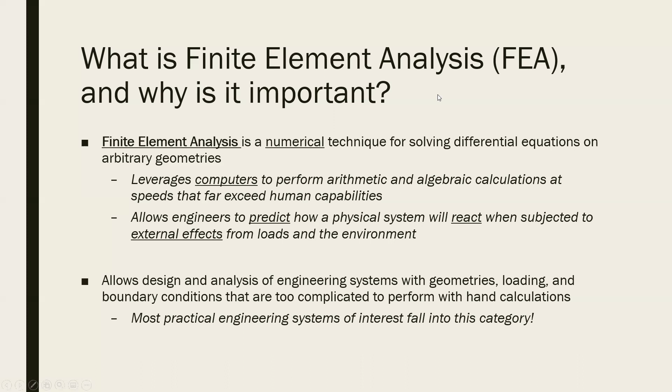The nice thing about finite elements is that it's not really limited to complexities in the geometry or the loading or the boundary conditions. A lot of times, when you're doing hand calculations, you're limited to really simple situations just so that you can actually solve the problem. But finite elements aren't really limited by these things. The nice thing about that is most engineering systems are in this category where they have a complex geometry, they have complex loading that you need to solve for. So finite elements really give you a chance to really analyze these systems in detail.

Alright, so let's talk about the different kinds of analysis that are out there. When you're performing what I like to call an engineering analysis, a lot of times you're trying to find out some information about your system. So let's say that you have a car, and you want to find out whether this car can withstand an impact, let's say it's crashing into a tree. There's different ways that you can go about finding out that information.

The first way that you can find this out is with what I like to call analytical methods. These are pen and paper calculations that solve, essentially you're solving some governing equations, you're doing some math, but because you're doing the calculations by hand, they have to be very, very simple. Because even humans with the highest computing capabilities, there's no way they can do computations on the order of computers. So if you're doing analytical methods, a lot of times you're doing simple calculations, kind of what people call back of the envelope calculations.

Analytical methods are great, and they have a role. It's not that people don't do these in industry, but they are limited to simple problems or simple calculations. The second type of analysis out there is experimental.

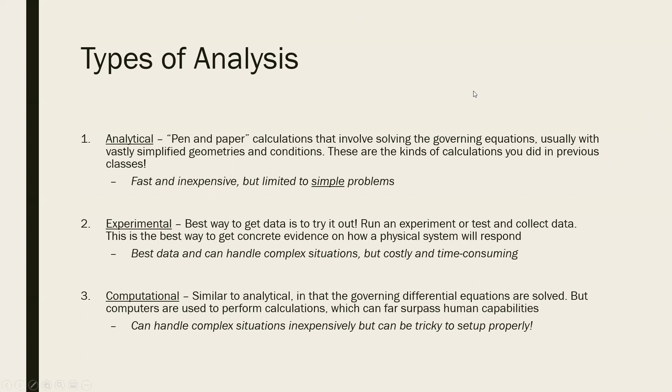If you have just a very simple beam like this, it's relatively easy to do. We can just solve the beam equations. We have just a simple 1D beam.

It's good. It's all good in the hood, right?

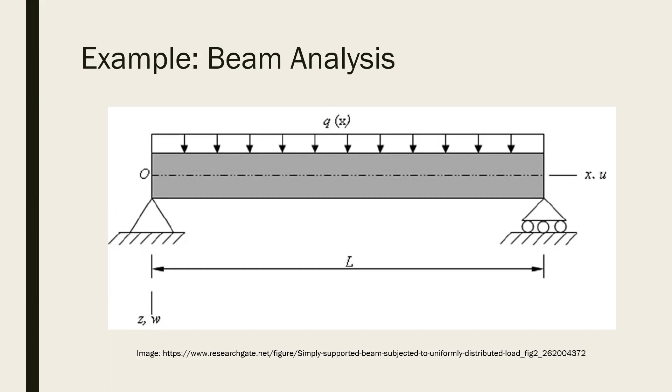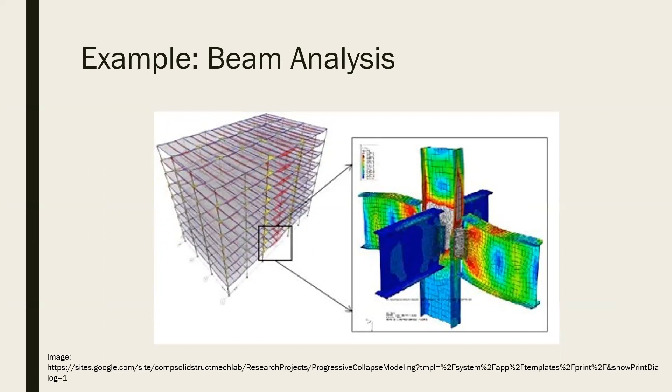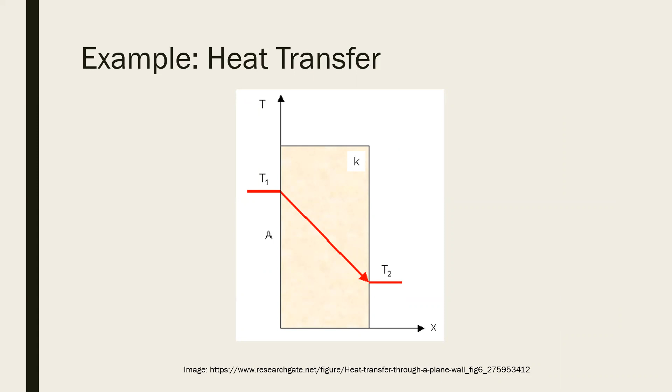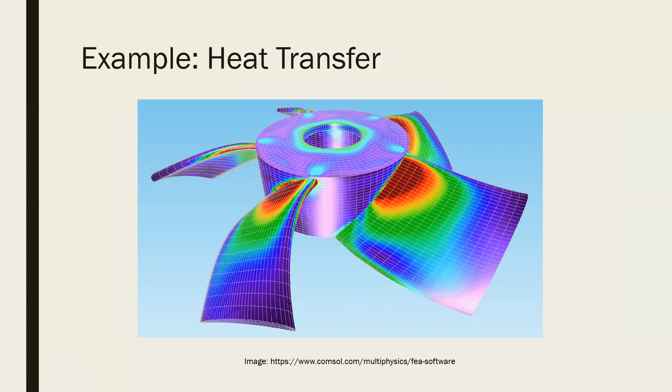Okay, let's do an example from heat transfer. If you want to find out the temperature distribution, or how the temperature varies in a solid block of material, it's simple to do if you have just a simple situation like this. But if you want to find the temperature distribution in a turbine as it's running, as hot air or hot gas is running past it, that's a lot harder to do with just hand calculations. So for something like this, you're going to have to run a simulation to get information that's useful for you.

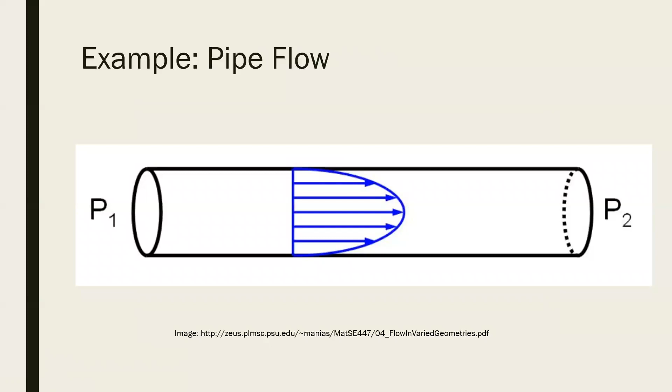And then lastly, we're not going to do much of this in this class, but you can also do fluid flow simulations. If you have fluid flow in a pipe, a simple situation like this, it's not too difficult to solve the equations and find out what the velocity looks like. But if you want to do something more interesting, like solve for the velocity of blood or fluid in your blood vessels, then you would have to run a simulation, because the boundary conditions and geometries are much more complex.

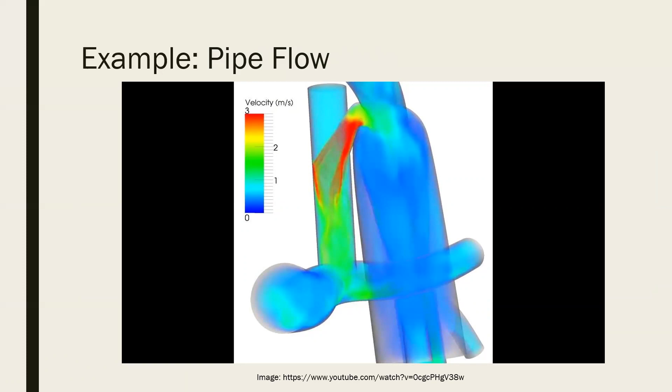All right, let's brainstorm here. I like to turn this to you guys, especially for a graduate class like this. I think a lot of you are coming in with a lot of experience, either working in industry right now, or from your undergraduate experience. So what are some situations you may have come across in your work, or a previous project, that you think you can apply finite elements to in order to analyze it?

I can jump in here, Professor. So a lot of the experiences I've had with finite element analysis...

So just to give a little background, there's something a lot of electronics companies use called a brazed cold wall heat exchanger. Typically it's a really thin piece of metal with an empty volume on the inside, and there's some sort of intricate path where the fluid flows through. There might be some fins on the inside, just bent pieces of aluminum that are bent hundreds of times in a really small space. They'll use finite element analysis to develop a model of what kind of pressure drop they could expect throughout that heat exchanger, and also to determine what sort of heat exchanger capacity they have available over the surface area of the brazed cold wall. So it's a twofold process where they'll use CFD to determine exactly how the fluid is functioning on the inside of the device, and also what sort of cooling capacity it could provide to electronics mounted to it.

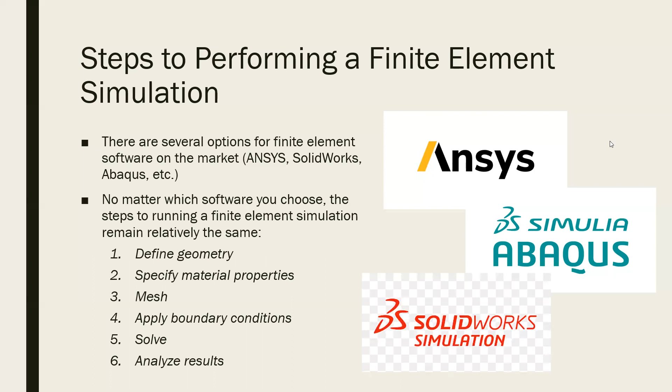Every company kind of has their own software that they like, and as Khan was saying, it's really convenient when it's all in one software. So if you can CAD, simulate, and produce drawings all from one software, that's super convenient.

The first step to any practical finite element simulation is you have to define the geometry. That means you have to define what the thing is you want to run your simulation on. Most of the time this comes in the form of some kind of CAD file. Most of us here are familiar with CAD - it stands for computer aided design, and it's just a digital representation of the geometry you want to simulate.

Let's say the goal of your engineering analysis is to find out the structural stresses inside a bridge. Then you need a CAD model of that bridge that defines the bridge geometry. Another example: let's say you want to find out how much a beam is going to deflect or deform. Then you need a CAD model for that beam.

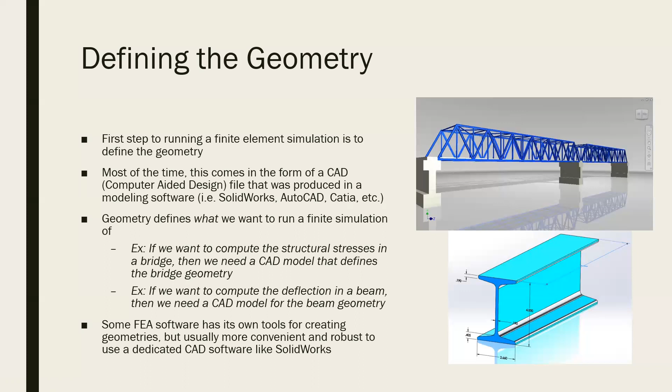A lot of finite element software has its own tools for creating geometries. ANSYS does have its own CAD tools, but they're not as convenient or as robust as a dedicated CAD software like SolidWorks. So a lot of times you'll produce the CAD in a different software, like SolidWorks, and then import that CAD file into ANSYS to perform a finite element simulation. But these softwares are trying to become a complete suite of tools, so maybe your company just has ANSYS, or maybe just SolidWorks. There might be less and less of this need as these softwares become more well-rounded.

The next thing you have to specify is the material properties. Now that you have your geometry, you have to specify what it's made out of. This is really important because different materials have different structural or thermal characteristics. It's important to assign these properly to ensure our finite element simulation is accurate and reliable. If your bridge is going to be made of steel, you don't want to assign its material as copper inside your simulation.

Or even plastic - that would be the worst thing, because copper has very different behavior and properties than steel. A lot of these materials have things like density, Young's modulus, Poisson's ratio, or if you're talking thermal, thermal conductivity and thermal capacity. These properties have a huge influence on how that structure or geometry responds to external forces, so you want to make sure you assign material properties properly.

Material properties might seem like a simple thing, because a lot of times people think of structural material properties as elastic modulus, density, Poisson's ratio - just a few numbers. But materials can become really complex. We'll go over this a lot later this semester, how to assign these properly. You can have really complex materials like anisotropic materials, composite materials, non-linear materials, and for those you need to be really careful about how you assign the material properties.

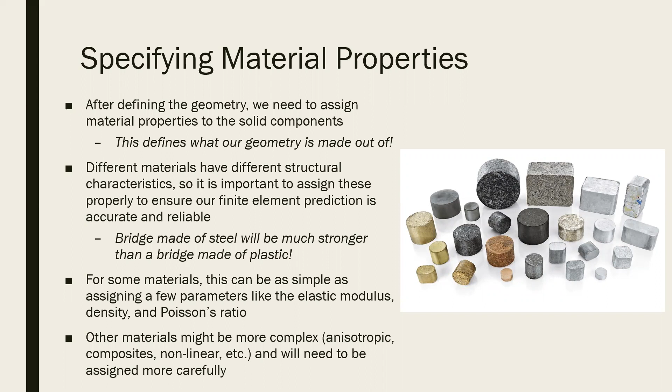Material properties is something that people kind of gloss over - they don't really think about it a lot when thinking of finite elements, but it's one of the most important things. We're going to spend a fair bit of time on how we quantify these things and how we assign them properly within ANSYS.

This is really important because the way the finite element method works is that it takes your complicated geometry and the complicated equations you want to solve, and produces a very simple algebraic system that the computer can solve. In order to do that, it needs to do this on a bunch of simple shapes, because underneath the hood, your ultimate goal is to solve these partial differential equations on your geometry, and the computer can't do that on this complicated thing, so it needs to break it up into a bunch of simple shapes.

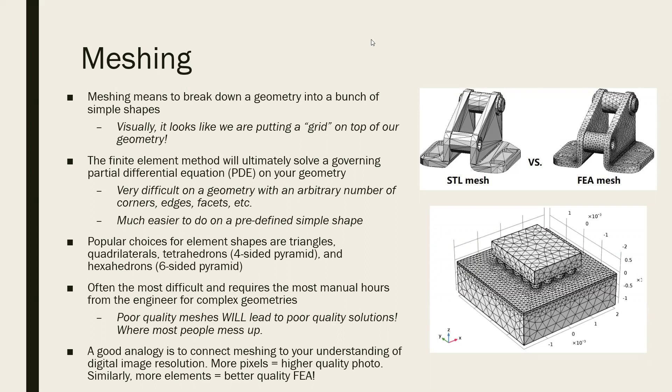Okay, so the next step is boundary conditions. Our goal with boundary conditions is to define how our solution is going to act on the boundaries of our geometry. The terms we'll use a lot: boundary conditions is kind of the general term for these kinds of things, but in this class we'll usually talk about them in terms of loads and constraints.

A load is any kind of external force that you're placing onto the structure, and a constraint is just some kind of way to constrain the motion of the system. So if we go back to our bridge example...

For a bridge, an example load could be the wind, which is going to push onto the bridge and cause some forces on it. Another example of a load could be all the cars driving over the bridge—the weight of those cars places a force on the bridge. The constraints are basically the places where we fix the bridge to the ground to prevent it from moving, so everywhere the bridge is bolted into the ground or into a structure.

Those are going to be the constraints of our system, right? So all of these kinds of things fall under the general category of boundary conditions. And so boundary conditions is kind of the other place, it forms a triplet. We've talked about material properties, we've talked about meshing, and boundary conditions is the third kind of thing that you have to be really careful of when you do finite elements.

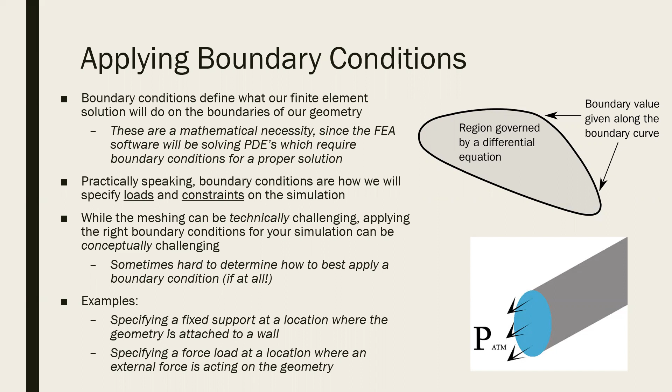Now that we've assigned the material properties, meshed, and applied the boundary conditions, actually all the hard part's done. So your job as the engineer is done, and now you're kind of like, I'm done with the problem, computer take the wheel. Now it's the computer's turn to do their work.

What you'll see in ANSYS is that there's kind of a magical button called solve. When you click that button, you're actually done, and at that point you kind of wait for the computer to do its work. But underneath the hood, what your computer is doing is millions or even billions of arithmetic calculations in order to solve your finite element simulation.

The way that it looks like is you have kind of a very large matrix set of equations. Finite elements is designed to create a linear system, AX equal B, where your matrix A is some kind of ginormous system like this. Even something like this doesn't even do it justice. Here you can actually see the individual entries, but that's usually not the case with finite elements.

With finite elements, a lot of times you're talking about a matrix that's like millions by millions. It's something that's way too big. I'm not kidding when I say this is like millions or billions of calculations, because it's intense. But the nice thing is you don't have to do any of it. You can just tell the computer to do it, and it'll do it. It might take a while, but it'll do it for you.

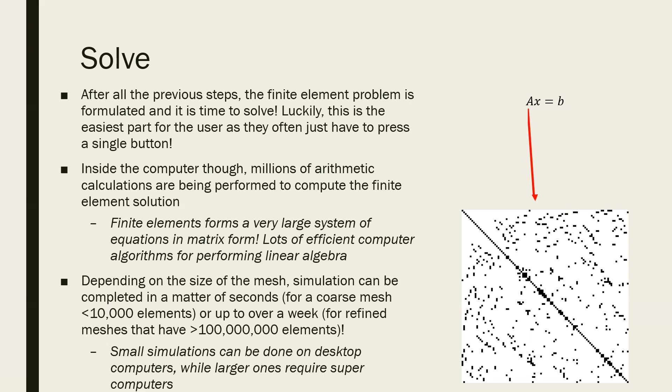For larger problems, this is the part where you have to be a little careful, because if you have a relatively small simulation with maybe around 10,000 elements, you can do that on your desktop computer. But I've seen some finite element simulations that have over 100 million elements, and these you have to run on some kind of supercomputer, otherwise you'd be waiting your entire lifetime for the results to finish. But for everything in this class, you'll be able to do it on your desktop computer, or in the worst case, on the lab computers inside the classroom.

Once the computer solves your results, you're ready to look at them. The last step in finite element analysis is to analyze your results. These results are displayed as spatial distributions of your quantities of interest, like a heat map of certain quantities in your structure. This heat map shows things like displacement or structural stress, using colors to show areas of high stress or high deflection, or blue for low stress or low deflection.

Another thing you can do is further process these results to show things like where the maximum stress is and where it occurs. This information can be used to predict whether a part will fail or not.

You can do additional post-processing to find other quantities of interest. I want to cover a bit more post-processing, because I think it's something not addressed a lot in these kinds of courses, but that'll probably come near the end of the course. Any questions so far on the finite element process?

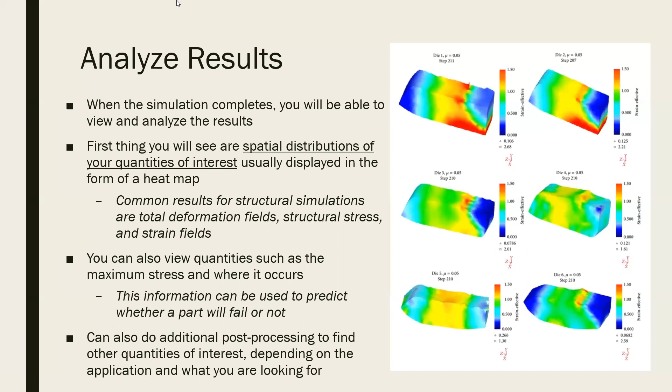Let's talk about finite elements and design, because this class has design in its title. It's important to see how finite elements factor into design.

Due to the digital nature of finite element software, it's having a much bigger role in the engineering design process. Simulations can significantly reduce the need for physical testing, thus saving you a lot of time and money.

But it's important to note, coming from someone who really believes in computations and simulations, that it will never eliminate physical testing. At the end of the day, you should never just take a simulation at its word. You should never say, I ran the simulations, I'm ready to build this part and sell it to millions of people. You should never do that.

You should always do some kind of physical testing, because no matter how good you are at setting up simulations, there will almost always be some factors you don't account for. Sometimes these factors are minor and don't have a big impact, but sometimes they can be really major. Sometimes you're not going to know unless you try it out.

You can run all the simulations in the world telling me your car will survive crashing into a tree, but I'm not going to believe it until you actually crash your car into a tree. That's coming from someone who lives and breathes simulations for all of my professional work. I want to make that really clear - simulations can be a great tool, but they will never fully replace physical testing.

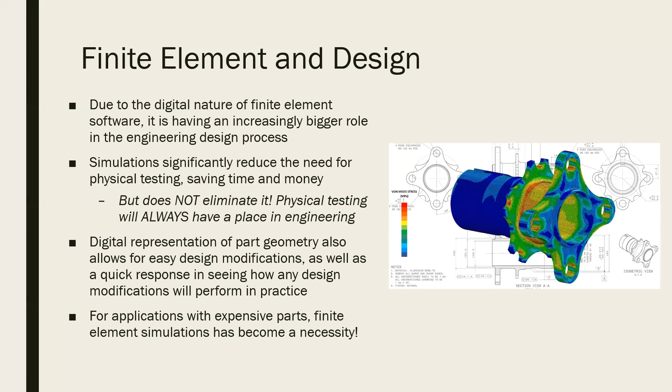For any industry working with really expensive parts - aerospace is kind of the big one - finite elements is a necessity, because you're not going to be building tons of airplanes or rocket ships just to test your hypotheses.

Another important point is that FEA is just a tool. It's honestly no better than the hammer you use in your workspace, or the drills you use, or the rulers, or any kind of measuring device. It might seem like a very sophisticated and trustworthy tool, but it's just like any tool - it's important not to misuse it.

This is a really tempting thing for people getting into FEA for the first time: you run a simulation and think, oh my God, that looks beautiful, that's gospel, that's the truth. I want you guys to caution against that, because it's really easy to set up an FEA simulation incorrectly and get garbage results, and then trust that as reality. That's what happens a lot for people getting into this for the first time.

In fact we have a saying in the simulation community: garbage in, garbage out. If you put garbage into your simulation, you have a crappy mesh, you assign it the wrong material properties, your boundary conditions are sus, you're going to get garbage out. You'll get results that either don't make sense or just aren't useful to you at all. FEA is a really great tool, but it's just a tool, and you can misuse it, and people do misuse it all the time.

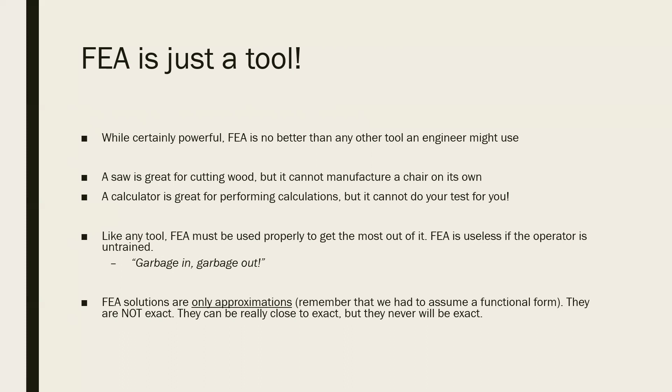The next phase of the class is finite element basics. We're going to go over the 3 key steps I talked about before: material properties, meshing, and boundary conditions. I call this the basics because we'll go over what you need to get started on this, but we're going to leave a lot of the advanced topics and nuance for later.

Then we're going to have an entire phase on just meshing. Meshing is probably the most important thing to learn for finite elements, and we're going to learn lots of different element types in ANSYS. We'll go into when you use certain element types, and look into mesh metrics, how do you determine what's a good mesh or not. We're going to go into advanced meshing in ANSYS, so a lot of the advanced meshing features are there.